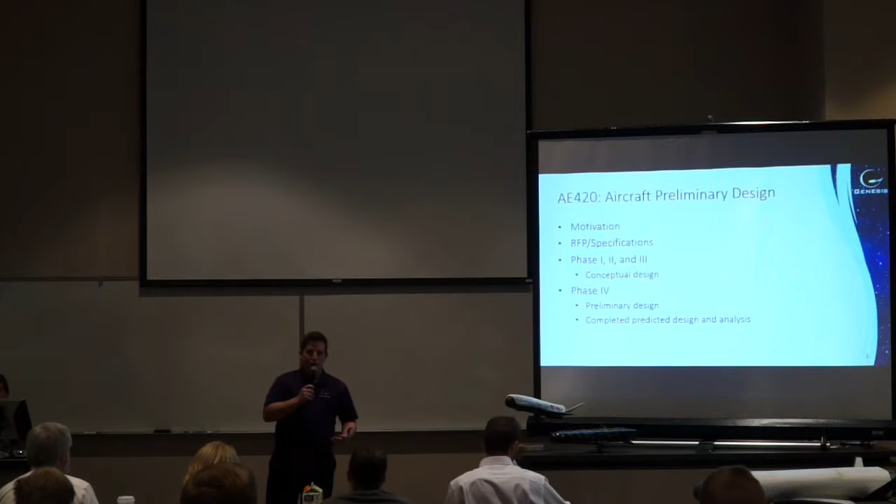This capstone project spanned 2 semesters. The first semester was AE420, the preliminary design. In this semester, we selected a project, received an RFP, went through conceptual design, followed by preliminary design, where we predicted performance values of the aircraft. This leads into detail design.

So our vehicle is an ambassador. It is the second stage in a 2-stage orbit launch platform. It serves the purpose to take satellites to low Earth orbit. This is relevant to today's industry as it is predicted that over the next decade, specifically the small satellite industry will be at a maximum. And those companies need a reliable, reusable, and therefore cost-effective method to take their payloads to low Earth orbit.

You just heard Launch Tech present their PT-1 design. It is the first stage. It carries us up to 60,000 feet, Mach 0.75, where we detach.

Moving into the RFP given to us, it is a combination from NASA and the DoD. 2 of the most constraining factors of this RFP were the 75,000-pound second stage weight limit imposed, as well as the fact that we had to be reusable. These 2 parameters significantly drove our design.

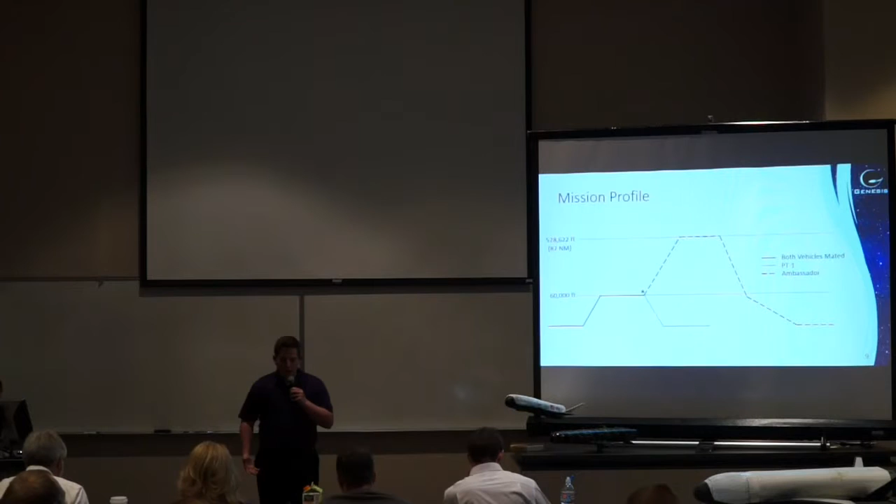Now, our conceptual design ended with these general conclusions. We decided to go with 2 RL-60s for our propulsion methods. We decided to go with unmanned operation. Furthermore, we went with a delta wing V-tail configuration, as is consistent with the majority of similar lifting body vehicles.

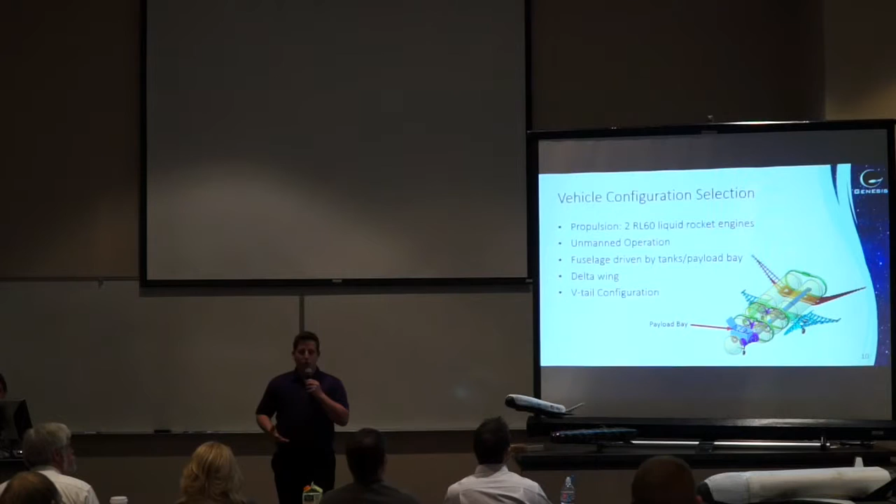And here's a 3-view of our preliminary aircraft design.

We ended preliminary design with a cost estimate for the entire project. These were based off of theoretical approximations, equations, and so forth. For an entire 3-system, that's 6-vehicle purchase, an initial investment of $13.5 billion. Each launch would then cost the operator $1.8 million.

Now I'd like to introduce Michael Rosnick to go over the preliminary predicted performance values with you. Thank you, Nick. So, as Nick just stated, I'll be going over the values that were predicted during the preliminary design of the Ambassador for its performance. These were all calculated using methods discussed in Raymer, Grant, and Nicolai, and some of the primary performance information is shown up on the screen.

The first plot I'll be showing you is the predicted CL alpha plot for the Ambassador. The aircraft was predicted to have a CL max of 1.1, and the wing was predicted to stall around 37 degrees angle of attack.

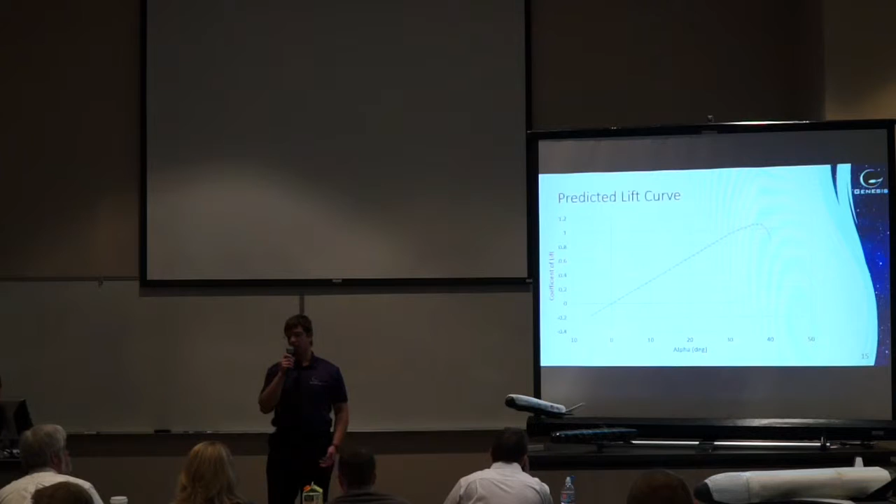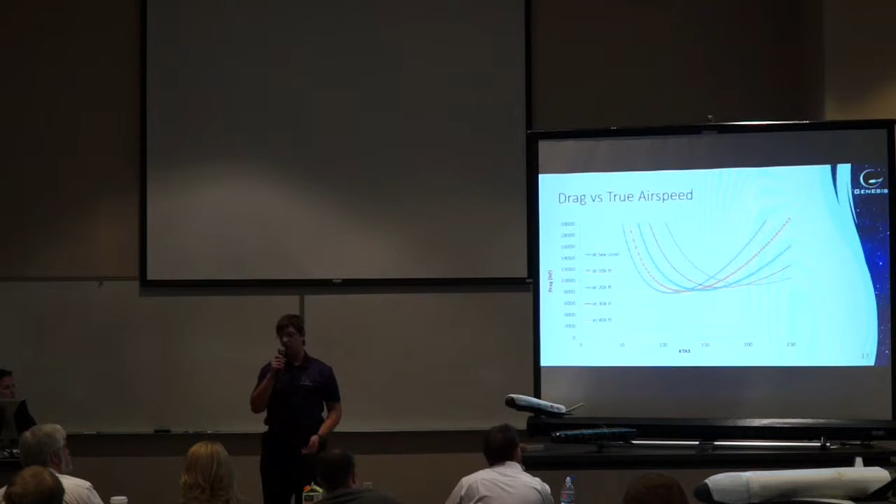Now, the drag versus true airspeed plot is shown, and this is plotted in increments of 10,000 feet from sea level to 40,000 feet. 40,000 feet is the altitude at which the Ambassador has fully transitioned from its ballistic phase of re-entry into gliding flight.

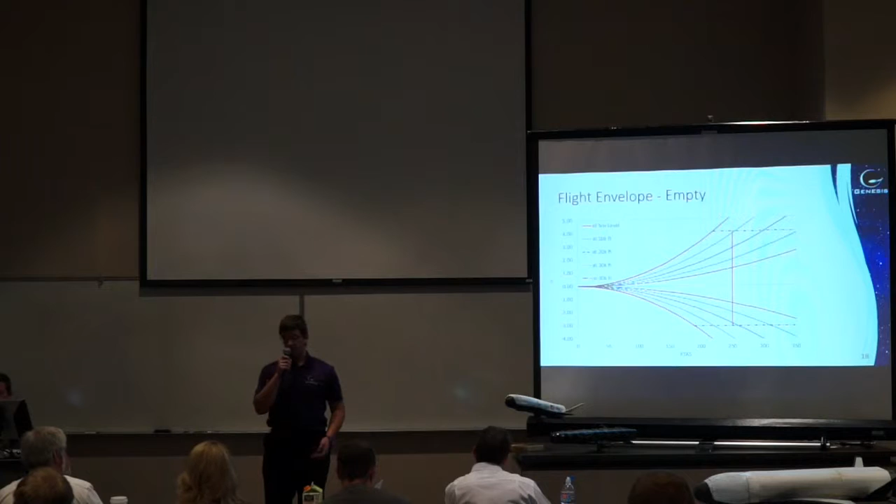Now the flight envelope is shown on the screen, and this is also shown plotted from sea level to 40,000 feet. The maximum positive load factor for the Ambassador is 4 Gs, maximum negative load factor of -3 Gs. The Q limit for the aircraft, as shown here, is 250 knots, and this is driven by the maximum landing speed. In flight, the Q limit of the aircraft is much greater than this.

Now, the trim plot for the Ambassador is shown with the CM alpha curves. These were plotted by looking at similar lifting body data, and we found that similar lifting bodies had a CM naught of roughly around 0.1. So this was used as a starting point.

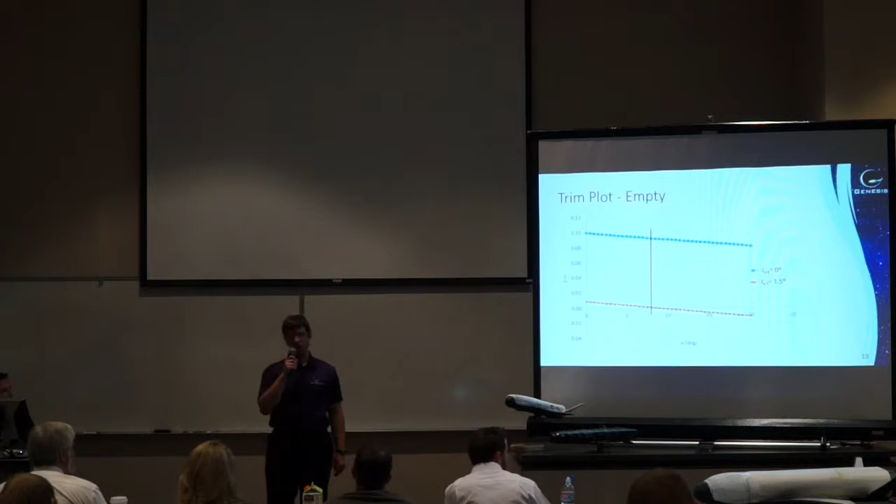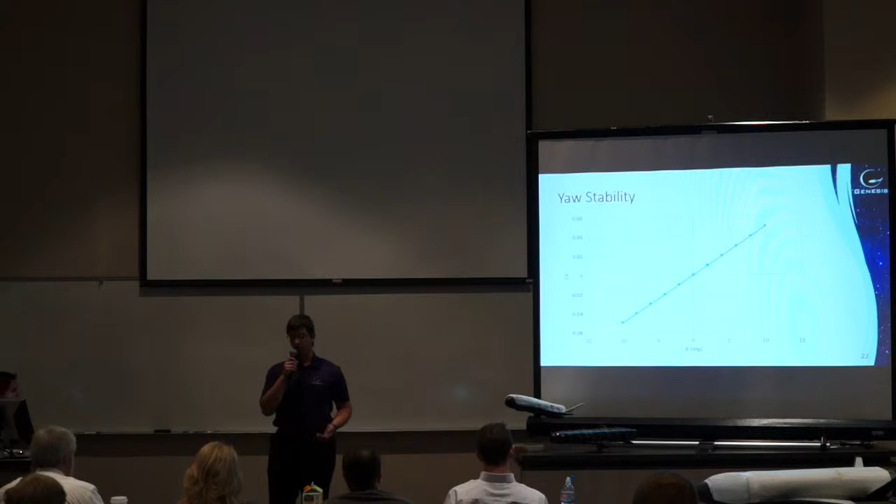Now the yaw stability plot for the aircraft is shown with a positive slope, indicating it was also predicted to be stable.

One other thing we wanted to do is try the aircraft as a flight test model. You can see that flight test model right here.

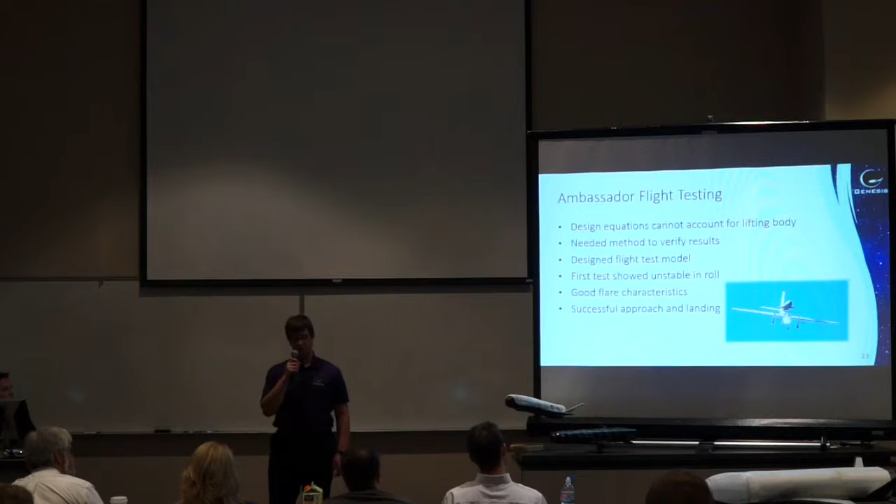One of the things we noticed is the design equations we used couldn't account for the lifting body design of our vehicle very well, so we wanted to verify that this design would actually fly. So this model was brought up on top of a larger remote-controlled aircraft and released from an altitude of about 200 feet. The initial tests found that the aircraft was very unstable in roll. This was corrected by adding a simple RC rate gyro to the aileron channel, and several successful approach and landing tests were conducted, with the vehicle found to have very good flare characteristics.

I'd now like to invite Veronica McGowan to talk about the initial wind tunnel model design.

Thank you, Michael. Everything you've heard in the presentation up until this point has been part of the preliminary design portion of the course. Everything from this point forward will be part of our detailed design course, things we worked on this semester specifically.

So the first thing we did this semester was design and build a wind tunnel model to verify these predictions that Michael just discussed from preliminary design. We also wanted to identify some areas in need of improvement so that we could further perfect the design and overall have a better vehicle at the end of the course.

So we chose a 1/32 scale model. You can see an isometric view of the CAD design there on the screen, and you can also see the wind tunnel model here on the table. We chose the 1/32 scale because we wanted the vehicle large enough to get good results.

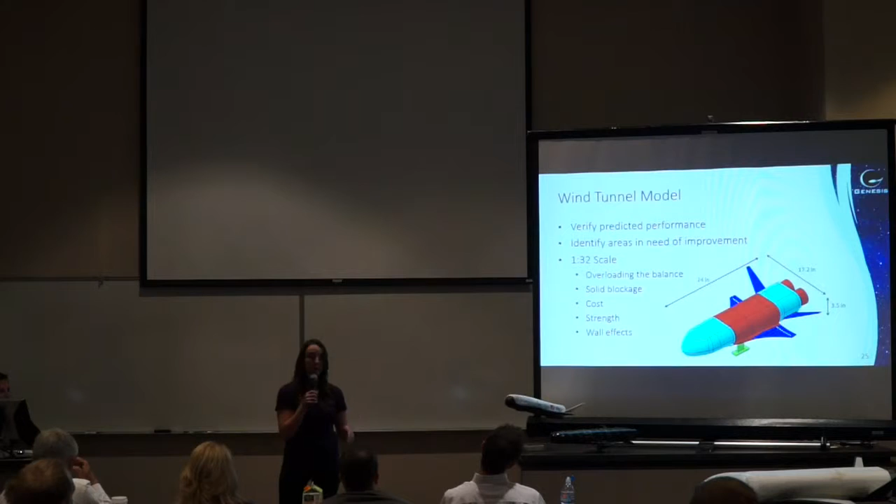However, we did have some constraining factors, the same ones you heard Launch Tech present as well. One of the big ones was not overloading the balance within the wind tunnel. We also wanted to avoid any wall effects or solid blockage. Also, we wanted to keep the cost down, and make sure our model was structurally sound.

So the model is made up of three different materials. We have ABS plastic, printed from the 3D printers in the rapid prototyping lab here on campus. We also had steel and aluminum components, and you can see the component breakdown per each material here on the screen.

So here's an exploded view of our model. You can see all the pieces pointed out right now are the plastic parts that we printed from the 3D printer. Overall, it was around $470 for the print.

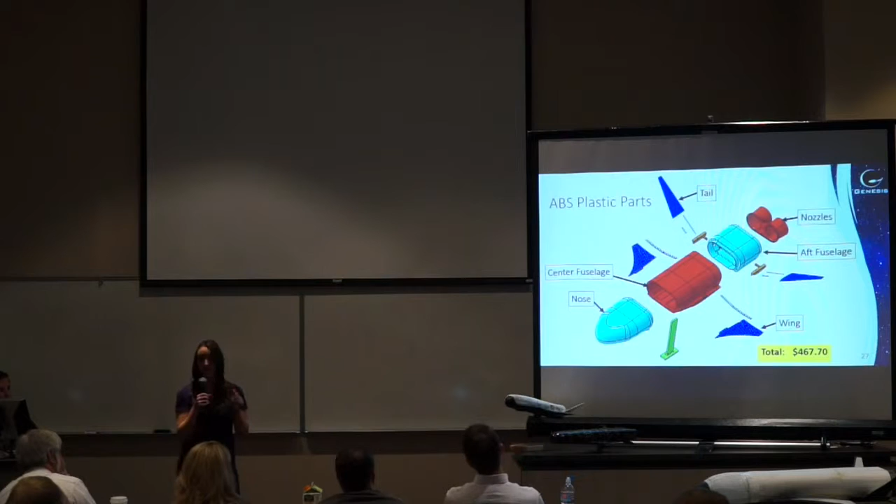Also, it's worth noting that the wings and tail surfaces were meant to be removable, so we could test without those. And the nozzle piece, the most aft portion piece you see there on the screen, was also designed to be removable, so we could access the inside of the fuselage and adjust set screws and tighten up those removable surfaces.

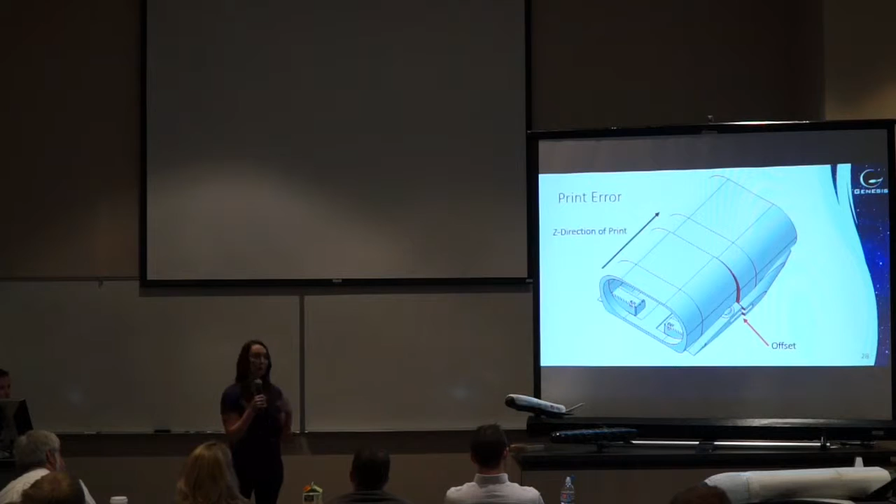So this was a very big print. It would have taken several hours to reprint it, more than a day, to reprint this piece. And due to the time constraint we had to figure out some way to salvage this piece. I'll get into more detail on that in the fabrication portion, but we were able to salvage it and continue with testing.

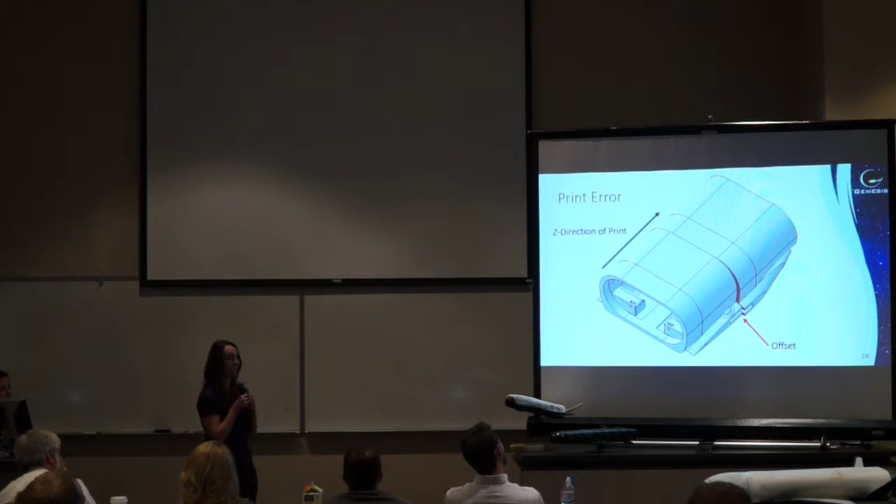So now I'm going to go into the fabrication of each of our components and then overall vehicle assembly.

So the first piece we had to fabricate was our Balance Mount. You guys noticed that Launch Tech had one as well. Ours was for the same intention, to lift the model slightly above the balance to try to reduce any drag interference we might get from that. So what we did is we purchased 1/4-inch steel from Prescott Steel here locally.

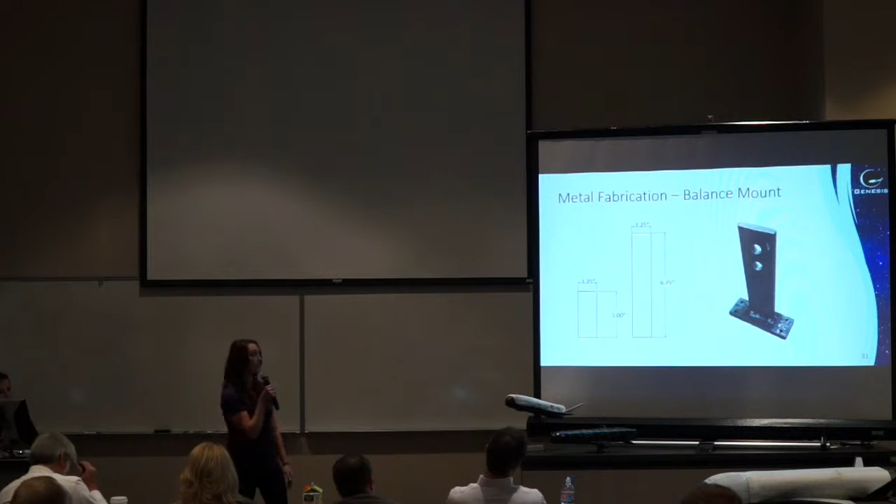We cut it down to the dimensions shown on the left of the screen. We had a welder weld the two pieces together on campus. We drilled holes on the horizontal piece to match those in the pyramidal balance, and we also have holes in the top portion to fasten it to our fuselage. We then put it up against the belt sander and got rid of those sharp edges to try to make it a little bit more aerodynamic in the wind tunnel.

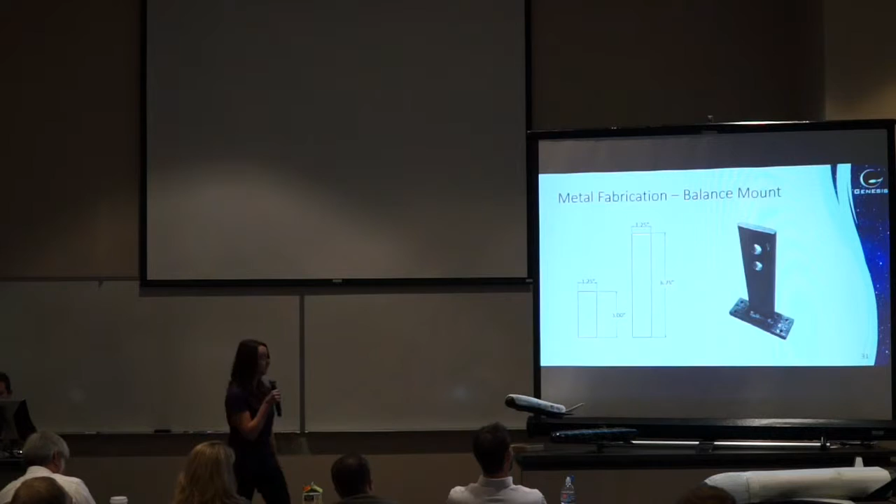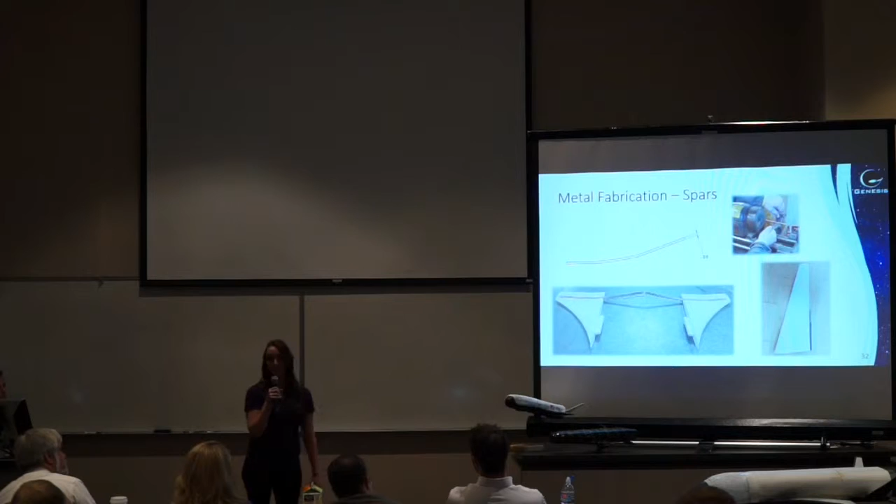We also had 2 spars on the V-tail surfaces: 1 forward, 1 aft, 0.2-inch and 1/8-inch respectively. One stuck out a little bit further as that would be the anchoring point to attach it to our model.

Another thing we had to fabricate out of metal was the tail mount. This is an interface piece that serves to fasten or anchor our V-tail surfaces to the model. Unfortunately, this was originally meant to be printed from ABS plastic, but during one of our test fits we noticed a crack start to develop. This is a very important piece, holding our V-tail surface to the model, so we wanted to make sure that was functioning properly during testing. So we ended up fabricating this out of solid aluminum.

You can see on the screen the only thing left that needed to be done at this point was drill 2 holes for the set screw and anchor the point.

So I mentioned that 3D printing error we had earlier. How we accounted for this was we basically cut the model in half right along that center fuselage offset line. We had a thick enough surface of the vehicle that we could actually drill through the vehicle's thickness and insert remaining rods we had from the V-tail spars. So we epoxied those rods in on either side of the cut, and we also epoxied to bond the 2 halves together of that center fuselage.

We also had leftover aluminum plates from our wing spars, so we were able to bolt that on either side of the center mount there, just to ensure we wouldn't get any bending and the vehicle would not disassemble in the middle of testing. We did use countersunk screws because we wanted to make sure the top surface of the fuselage was as flush as possible so as not to interfere with the flow during testing.

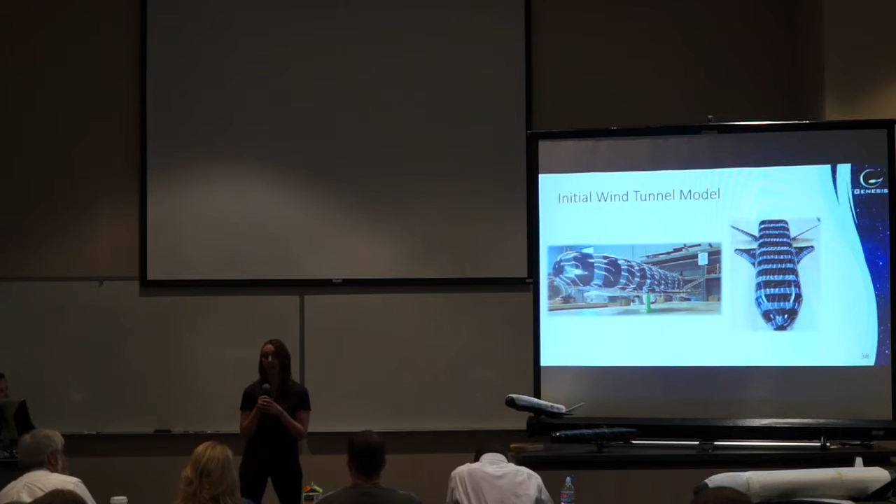So what you guys are seeing on the screen now is the initial wind tunnel model, a 1/32 scale replica of the preliminary design vehicle we came up with. We used hardware available to us at the machine shop to assemble the vehicle together, and with this model we went through our first series of wind tunnel tests.

The configurations you're seeing on the screen: FWE, which stands for fuselage, wing, and empennage, is our fully assembled vehicle. We also had an FW configuration, fuselage and wing only, with the V-tail removed. Then the F configuration, fuselage only, with the wings and V-tail removed. You'll see these mentioned throughout the rest of the report, so there's a visualization for you to see what it looked like throughout testing.

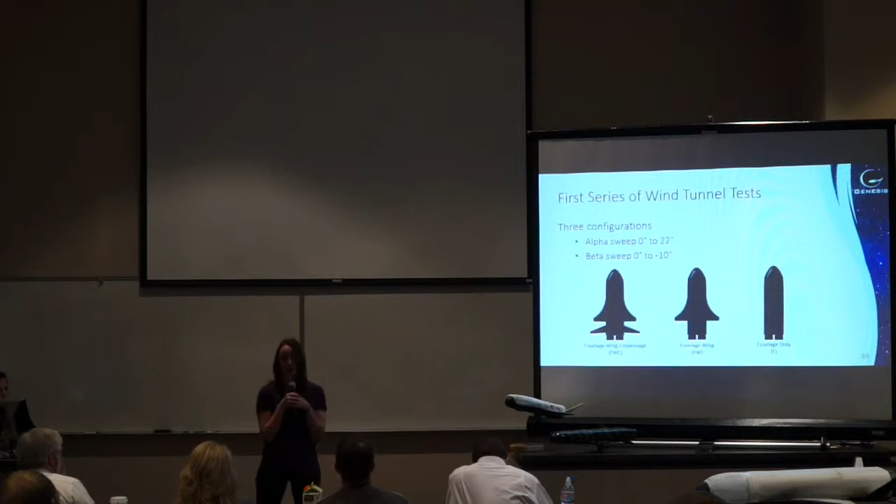Now the reason we did this is we wanted to test how effective our aerodynamic surfaces were. We also have a lifting body fuselage, so we wanted to see the effect of that as well in the wind tunnel test. So we ran through two sweeps with each of these configurations, a full alpha sweep and a full beta sweep.

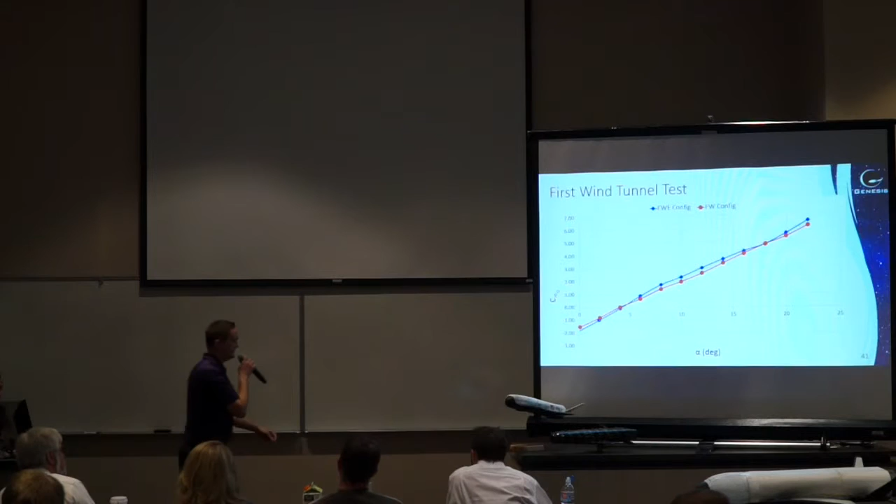So after we completed our first set of wind tunnel testing, we were looking at our data and noticed a few anomalies or weird things we didn't expect to see. What you're looking at here is a small sample of that data. This is a pitch stability plot comparing our full FWE configuration along with our tail-off configuration, or FW. A couple things we noticed that looked weird with this plot: one, the magnitudes were absolutely huge.

We were getting pitch moment coefficient magnitudes of upwards of 7, which didn't make sense to us. The second thing we noticed was when we took the tail off, it slightly stabilized us, and since the tails are at the back of the vehicle, that didn't make much physical sense. How could you take the tails off and have that help stabilize you in pitch? So we thought something might be wrong here.

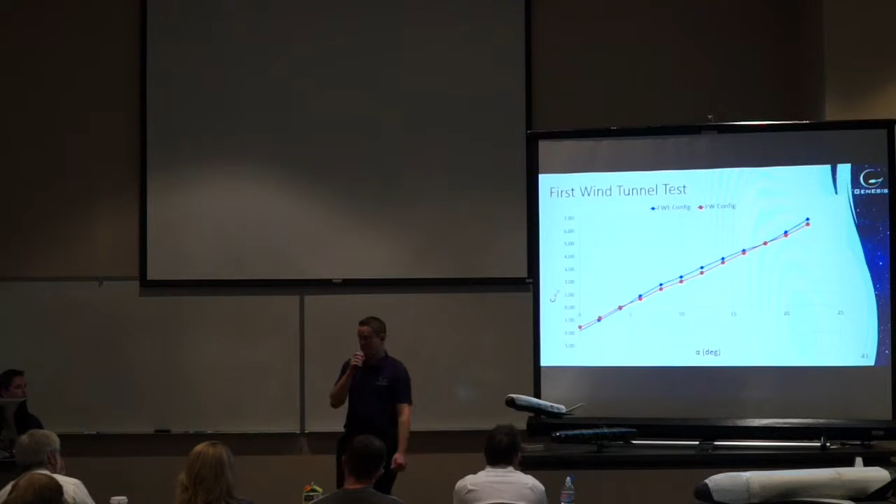We decided to review our procedures and check out the wind tunnel testing equipment. What we found was that during setup of the wind tunnel, we actually entered our CG improperly into our data acquisition software. So our CG that we were testing with was very far aft and above the model, which explained our huge pitching moment coefficients as well as the tail-off stabilizing effect.

So we attempted to correct this data with statics equations, and that went okay, but we didn't really trust that data because we had to make some assumptions about what our data acquisition software was doing, and we didn't trust those assumptions. So from this point forward, we decided we're not going to look at this data.

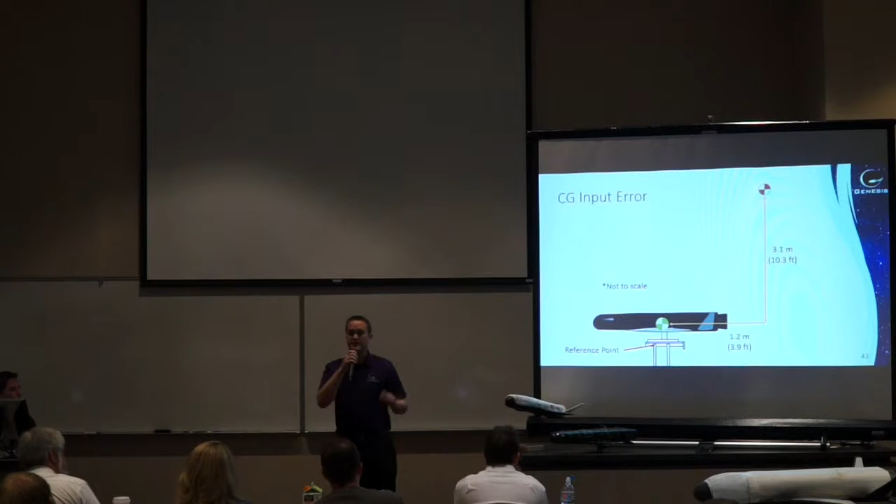Any data you see from this point forward is going to be either predicted from our preliminary design semester, or data from our second set of wind tunnel tests, which I'll get to in a bit. For that second set of wind tunnel testing, the first thing we wanted to do was retest our full model, our FWE configuration, to establish a baseline to compare our modifications against.

The second thing we wanted to do was test our control authority with our all-moving V-tail surfaces. The last thing we wanted to do was add a body flap to our model. This is because most lifting body vehicles have a body flap, and we did not have good equations to account for that in our preliminary design semester, so we wanted to add one during our wind tunnel phase of testing to see what its effect on the control of our vehicle would be.

Now, the V-tail incidence angle is defined with respect to our dihedral plane. The tails are at a 28-degree dihedral angle, and the model already had that capability built into it because that was something we were planning on adding.

The V-tails were friction fit into the model using internal set screws, and all you had to do with the model was just grab and rotate the tails by hand.

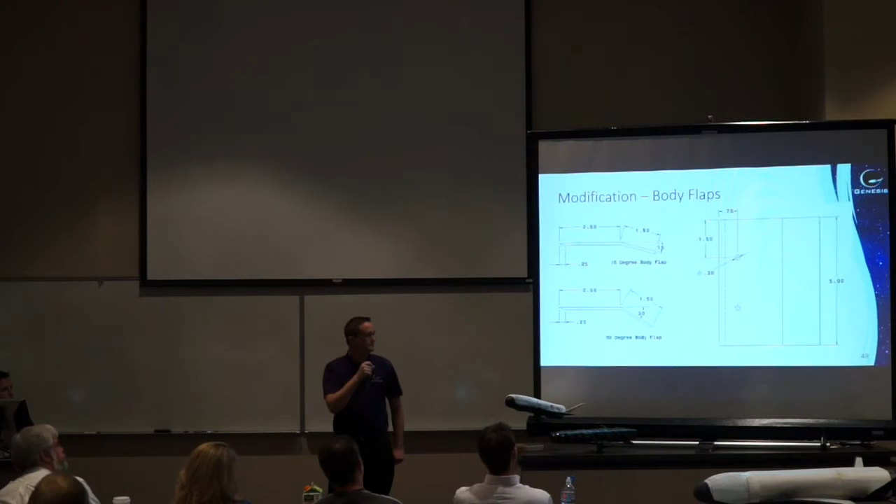Now for the body flaps themselves, they were fixed. They could not deflect like the V-tails could. So those were just made out of flat plate aluminum, and we had 2 testing points, a 15-degree deflection as well as a 30-degree deflection. Each of those is shown on the left-hand side of the screen there along with their overall dimensions.

To make those body flaps, we sheared the flat sheet of aluminum into the proper overall dimensions. We bent it into shape using a sheet metal brake. On the right-hand side of the screen, you can see a test fit of one of our completed body flaps.

Now, to make the body flaps, we just used scrap sheet of aluminum that we found in our machine shop, so that didn't cost us anything. That keeps the overall cost of our model for wind tunnel testing at about $475.

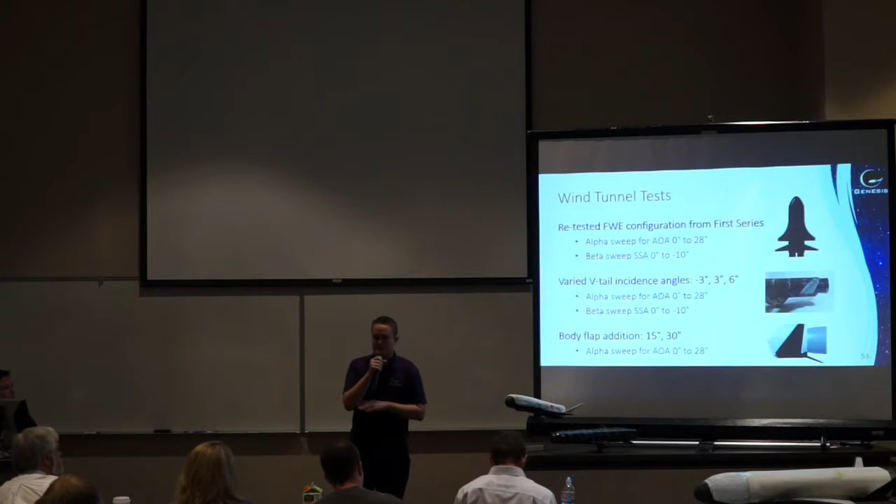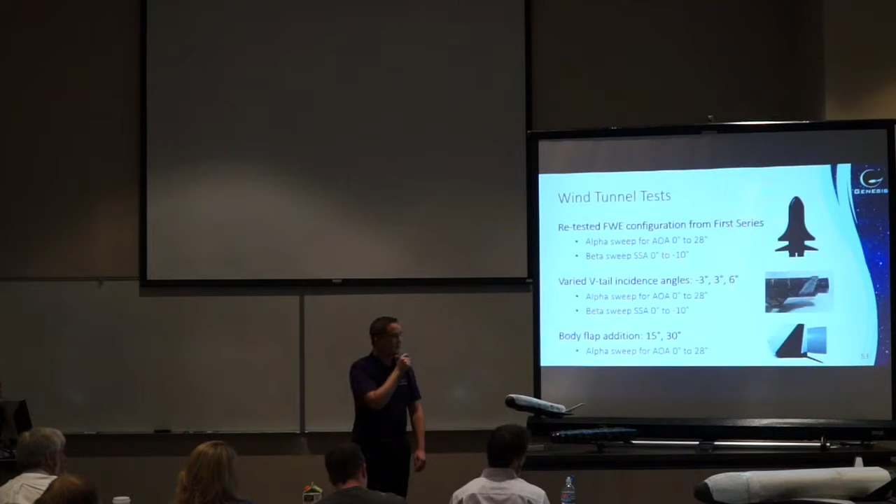So just to reiterate the wind tunnel test we are doing in our second set of wind tunnel testing here, we are retesting our FWE configuration. We did an alpha and beta sweep with that model just to establish our baseline for comparison against our prelim semester. Secondly, we varied our V-tail incidence with -3, +3, and +6 degrees of V-tail incidence.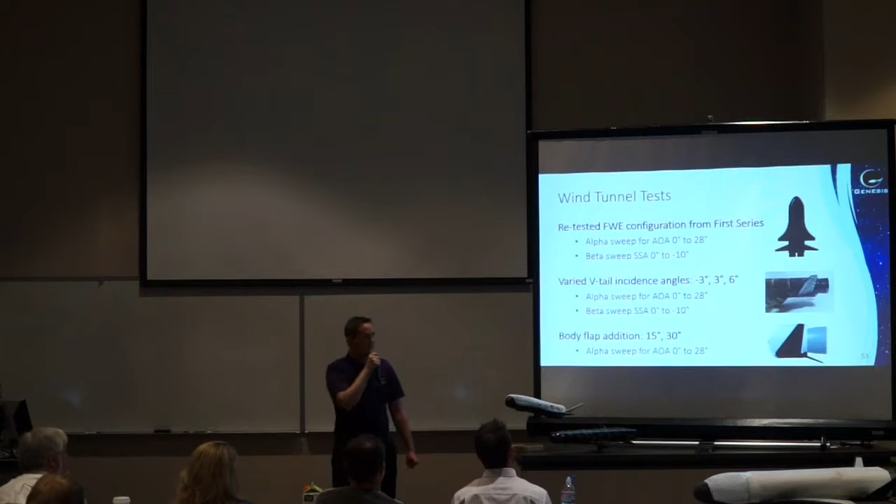We did an alpha and beta sweep with each one of those test points. Lastly, we reset the tails back to neutral incidence, and we tested a 15 and 30-degree body flap deflection with just an alpha sweep for each one of those test points. Now I'd like to welcome up Chris Crawford to talk to you about our wind tunnel and some of the data that we got from those tests.

Thank you, Brandon. So as you can see, this is an overview of the wind tunnel we used. We used an AeroLab 87 series closed circuit wind tunnel. The test section of this wind tunnel had a cross section of 35 by 42 inches.

Inside the test section was a pyramidal balance. This balance is capable of performing the things you see on the screen here. In addition, the maximum and minimum angle of attack shown, and the sideslip angle variations. Also, we imposed a 40-pound load limit on this balance, so we do not overload it.

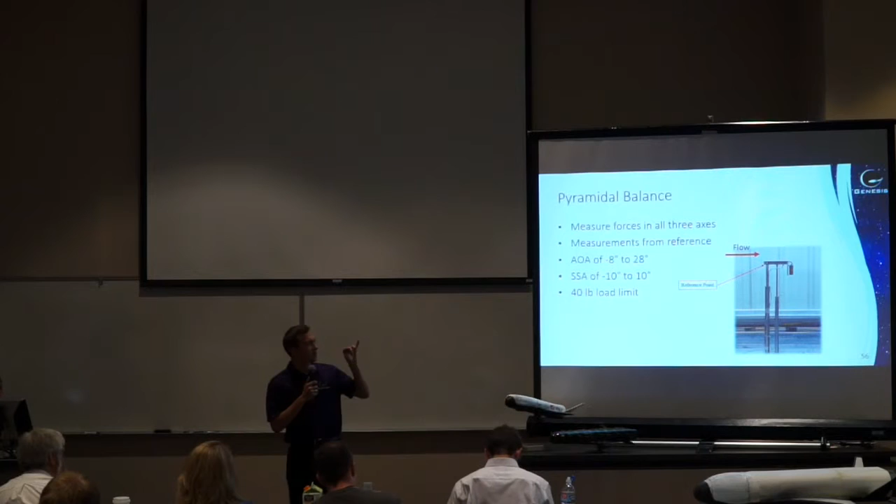One thing I forgot to mention previously was there was a reference point indicated on the balance. This point is where all the CGs are referenced from.

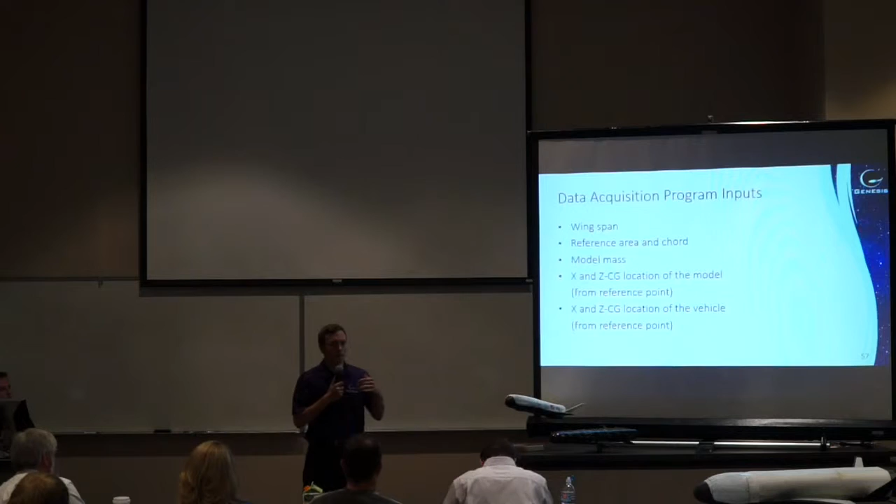The data acquisition program required inputs, primarily geometric inputs of the model, to non-dimensionalize the aerodynamic parameters we'll be getting from the balance. A couple of important parameters are the X and Z CG location of the model, and also the X and Z CG location of the vehicle. The X and Z CG location of the vehicle were scaled down to the size of the model.

This is the model structural test we performed once the model was in the wind tunnel, to ensure it was capable of withstanding the forces in the wind tunnel. From this, we determined that the angle of attack range we would test at was 0 to 28 degrees, and the velocity would be 24 meters per second, or about 79 feet per second.

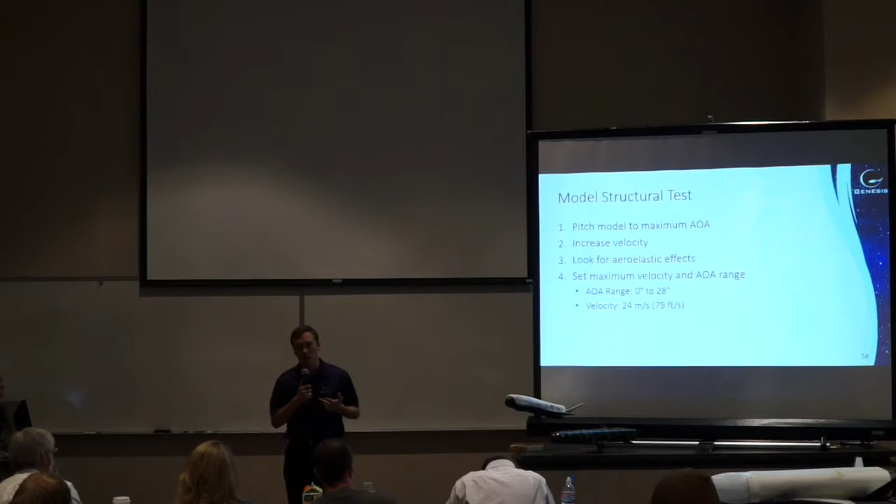In addition, we did a tare procedure to try to counteract some of the effects that the pyramidal balance might have on the aerodynamic properties of the model. This was done with the balance at 0 degrees.

The primary methods we used to collect the forces and moments on the model were alpha and beta sweeps. An alpha sweep was conducted to find lift, drag, and pitching moment data. Beta sweeps were conducted to find yaw and roll parameters.

So you can see here that the next few plots are going to show tests from our second set of wind tunnel testing, like Brandon stated earlier.

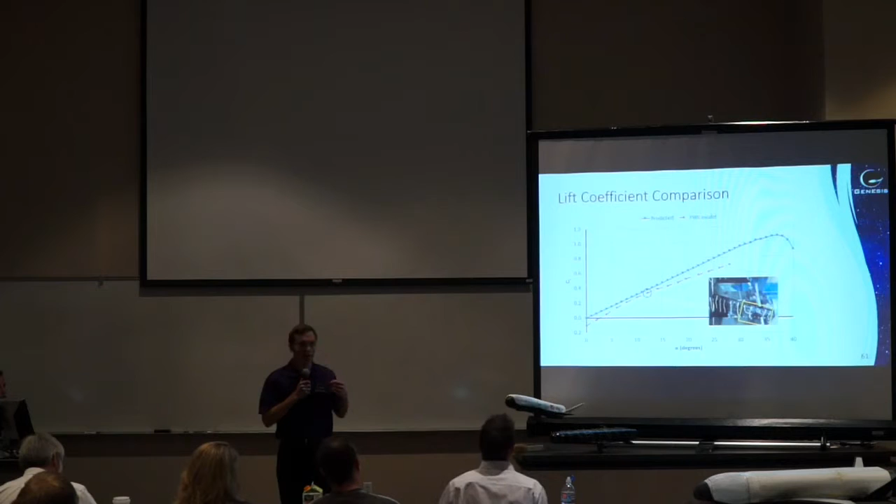This is a graph of the lift curve slope. As you can see, it matches fairly well, except at about 12 degrees, where there's a deviance in the slope of the CL-alpha plot. This is due to the fact that the tails began to stall at this point. You can see this corroborated with the flow shown on the plot.

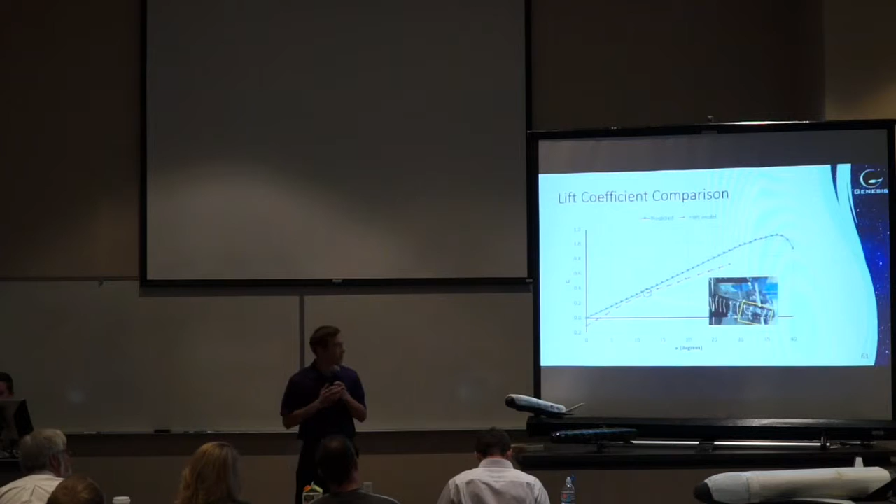The V-n diagram did not change appreciably from the preliminary design phase. So here's the V-n diagram again.

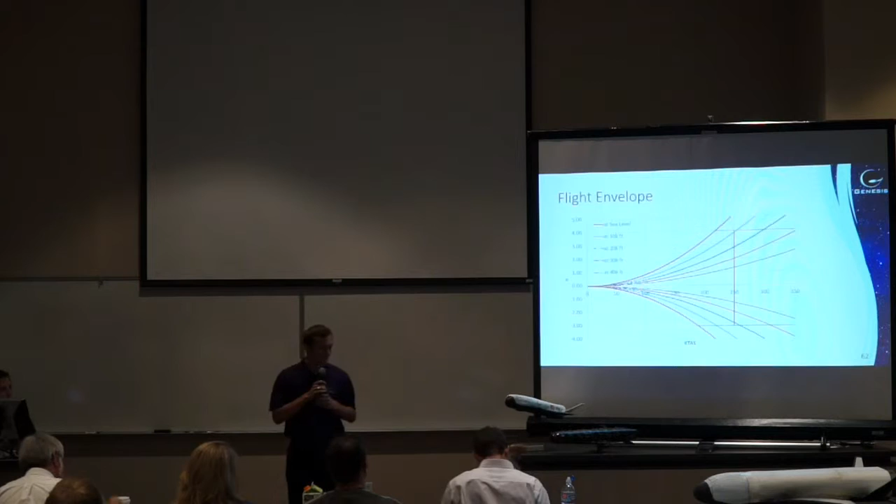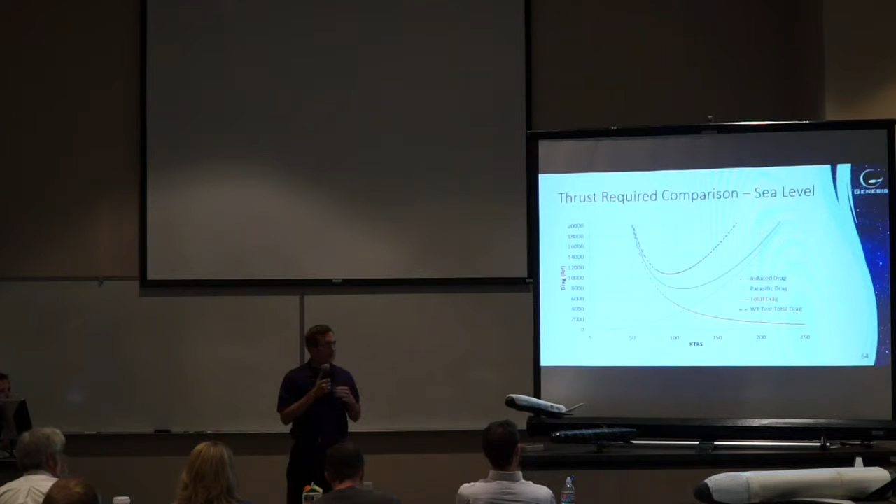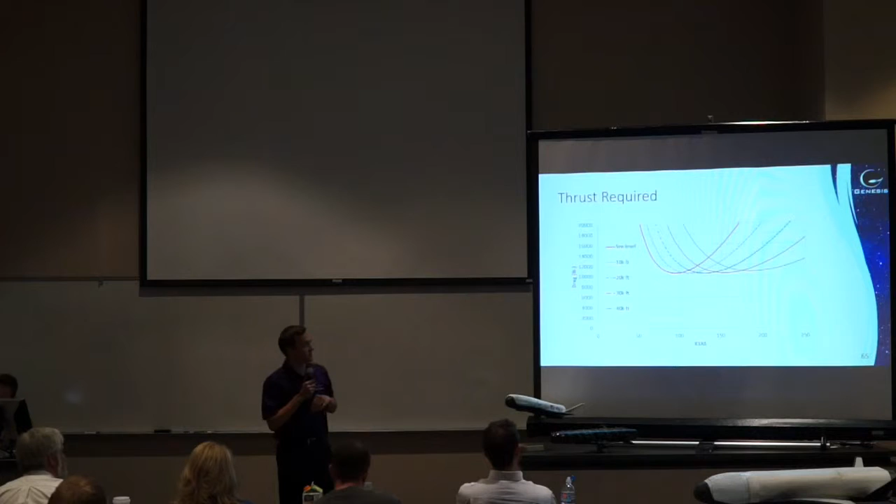The drag we predicted was also significantly lower. The most likely reason for the increase in drag was due to the separation of drag on the fuselage, which we couldn't really account for in the preliminary design phase. This increase in CD naught shifted our thrust required plot, the minimum drag point, to the left a little bit, as you can see in this plot. This also shifted the overall thrust required plot up because of the increase in drag.

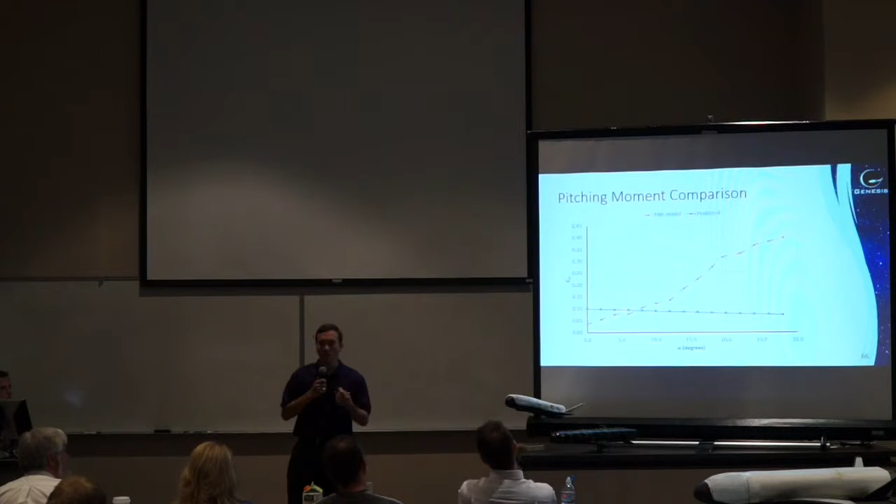Here you can see the pitching moment we got from the wind tunnel model. As you can see, there's a significant difference from what we predicted. This is primarily due to the fuselage effects that we couldn't readily estimate in the preliminary design phase.

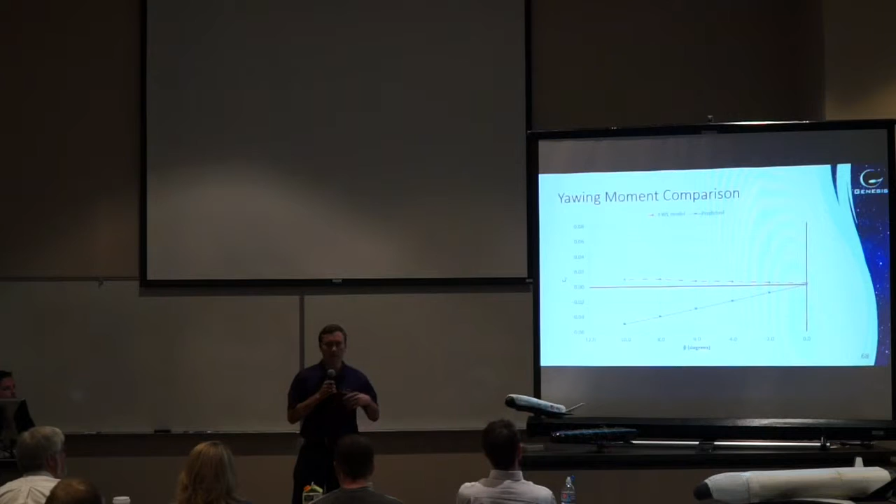Again, here you can see a yaw moment comparison. Yaw moment is relatively neutral compared to the predicted value, and again the reason for this is possibly due to the blanketing effect of the fuselage on the opposite tail.

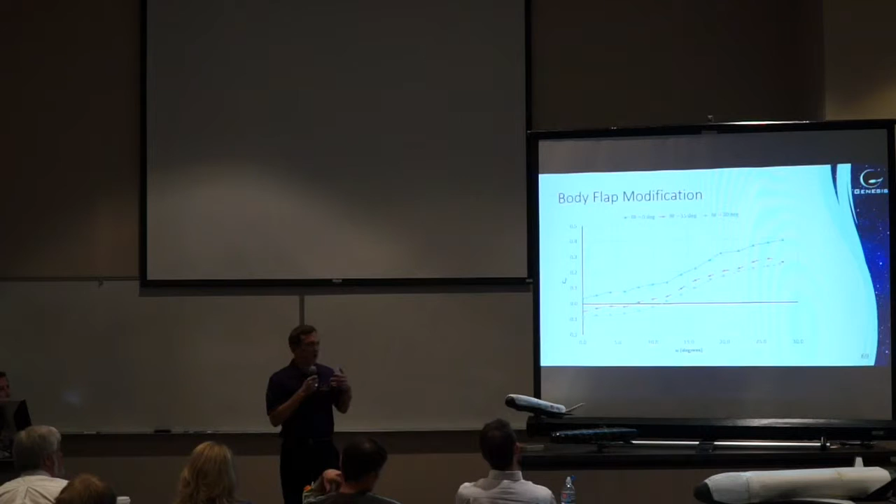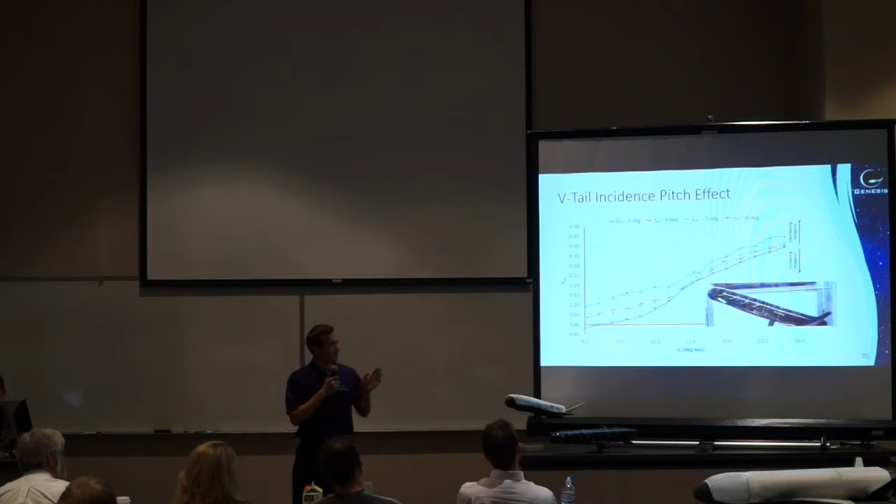One other thing to note is that there's a sharp increase at about 8 degrees at various points. This is due to the shifting stall of the tail as the incidence increases. Also, you see a kind of bottlenecking of the data around the zero and positive incidence angles of the tail. We theorize this is due to the downwash effect induced on the tails of the model.

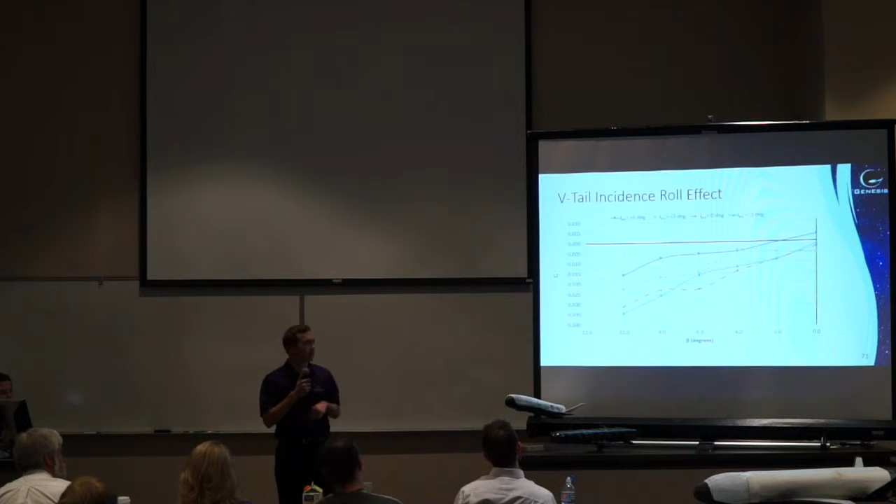Again, this is the effect of the tail incidence on rolls, and as expected, they decrease the value of the rolling moment. You also notice some variance along the slope. One theorized reason is the effects of the fuselage and the congestion in flow at the tails, which could vary the rolling moment. Also, increasing incidence increases the yaw moment.

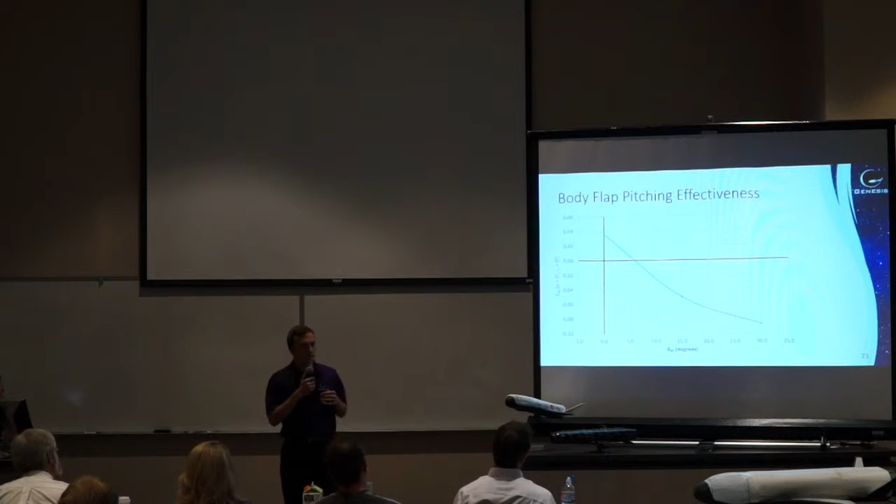Here you can see a plot of the body flap effectiveness. While the body flap does not change the slope of the overall aircraft CM alpha, it does shift the value and is effective at doing that. You also notice that the trend is fairly nonlinear, as indicated earlier.

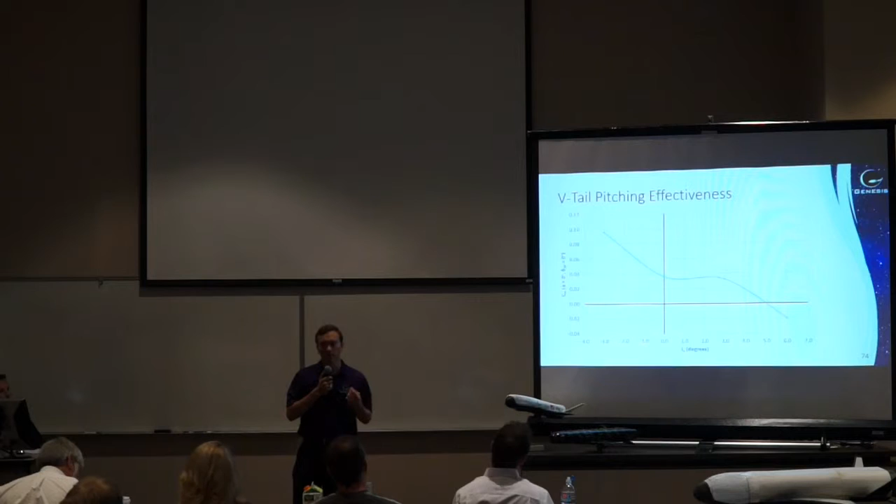In addition, the V-tail has similar nonlinear trends. You can see where the data earlier was bottlenecked, where slightly positive incidence angles of the V-tail are not nearly as effective as a negative deflection. This is theorized to be due to the fact that at negative incidence angles, the V-tail is removed from some of the congestion present on the upper surface.

Now I'd like to welcome up Morgan Cherry to talk about the flow visualization and the requirements.

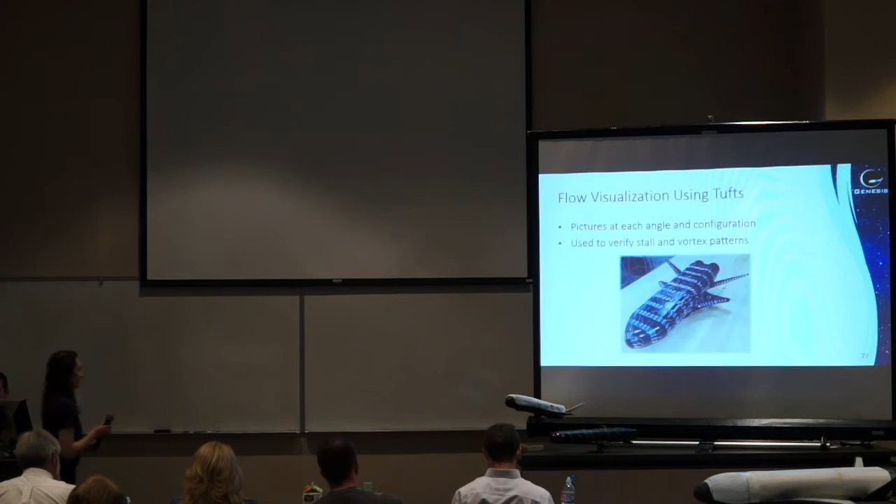Thank you, Chris. As Veronica previously mentioned, we added tufts to the model to visualize the flow. To capture the flow visualization, we took pictures from the side and top of the model at every angle and configuration. Flow visualization is important because it can show the flow over the model and serve as verification for the stall and vortex flow patterns seen in the plotted data.

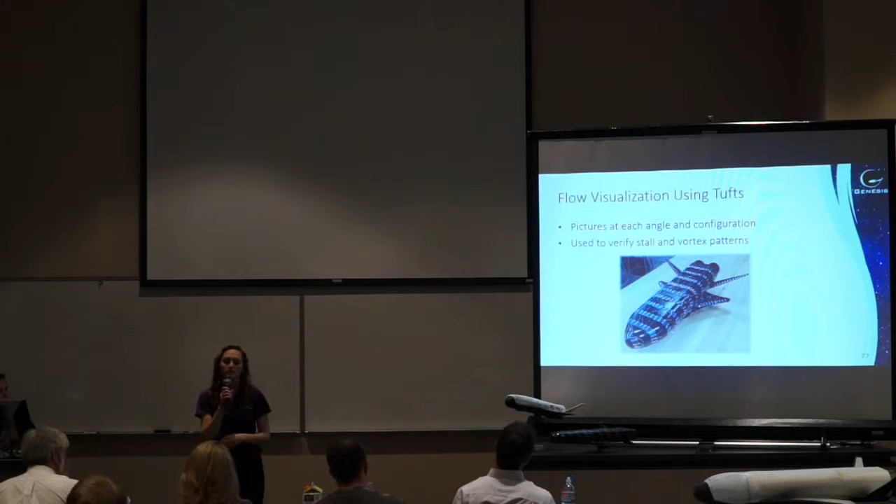The first disturbance in the flow we saw was at 8 degrees alpha on the wings. At the leading edge of the wings, the tufts began to curl outward and around, indicating leading edge vortex flow. Also at 14 degrees, the wings are now dominated by this leading edge vortex flow, with the tufts curling around and pointing along the path of the vortex.

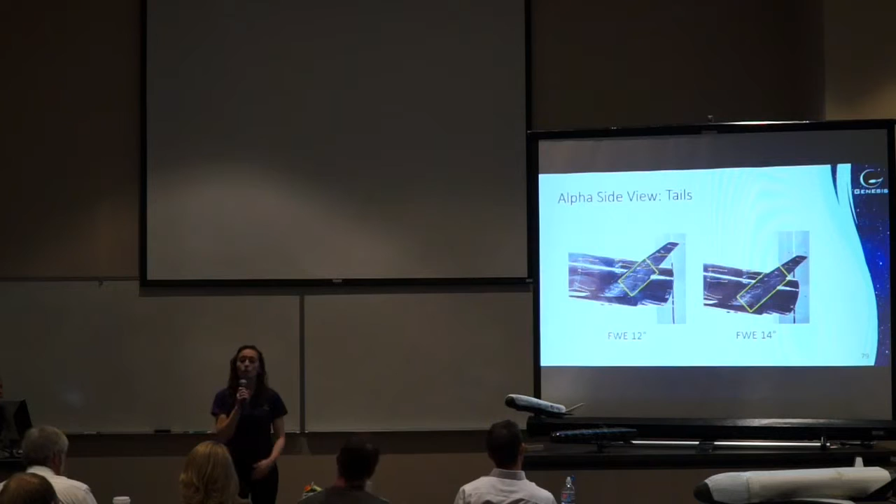Also at 12 degrees, on the underside of the tails, we noticed disturbed flow. This could be due to forebody vortices. However, because the flow wasn't visualized off the surface, we could not verify this theory.

Also at 12 degrees, from the top view of the tails, you can see we're starting to get some flow separation. So at 12 degrees, the tails are beginning to stall, and by 14 degrees, the tails are fully stalled.

Now, for a tail incidence angle at -3 degrees, the tails begin to stall at 14 degrees and are completely stalled by 18 degrees. At an incidence angle of +3 degrees, the tails begin to stall even earlier, at 8 degrees, and are completely stalled by 14 degrees. And at an incidence angle of +6 degrees, the tails begin to stall at 6 degrees and are fully stalled by 10 degrees. The pattern we're seeing is that the tails are fully stalled 4 degrees earlier as the incidence angle is increased.

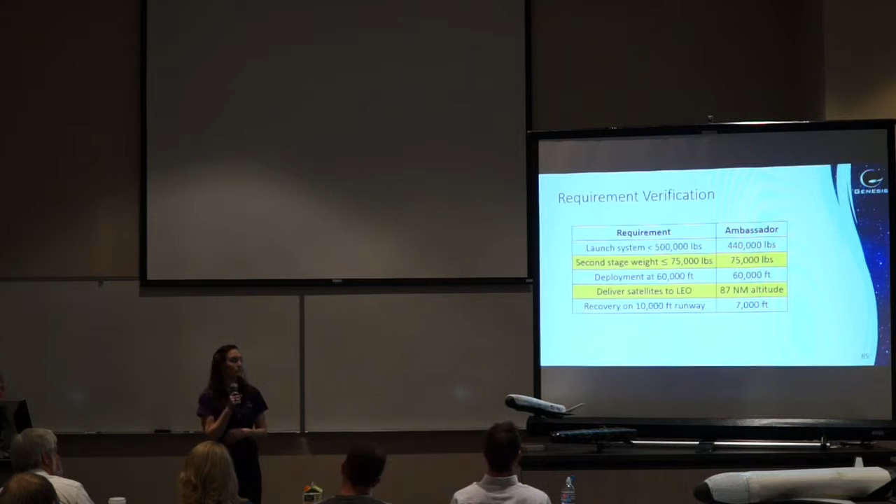Now we do meet all of the RFP requirements you're seeing on the screen. However, we barely meet the weight requirement of 75,000 pounds for delivering our satellites to low Earth orbit. Low Earth orbit extends from 87 to 174 nautical miles, and we're only reaching 87 nautical miles due to our weight and the current propulsion systems available to us. We also meet the RFP and CFR requirements listed on the screen. The only thing left to do would be to acquire mission and operator licenses.

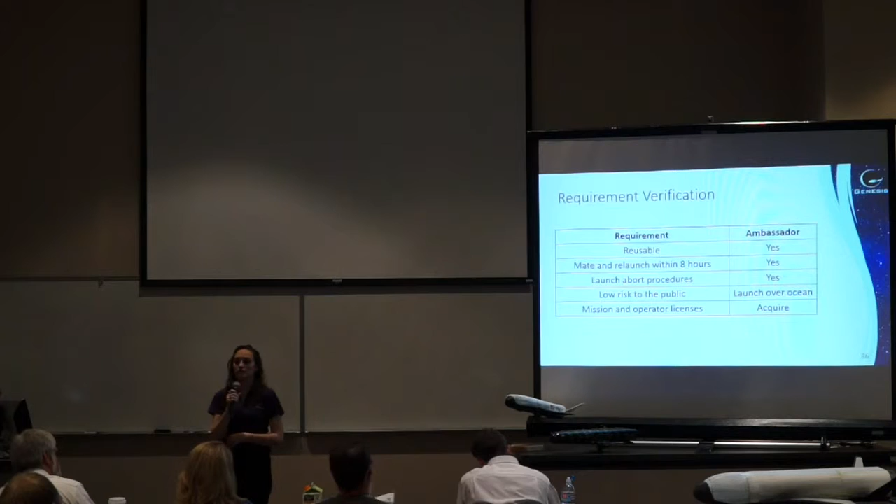Now I'd like to invite Erica to talk about the structural layout and analysis.

Now what you're seeing is the VN diagram for our wings. This is not to be confused with our flight envelope. This is in KEAS, not true airspeed.

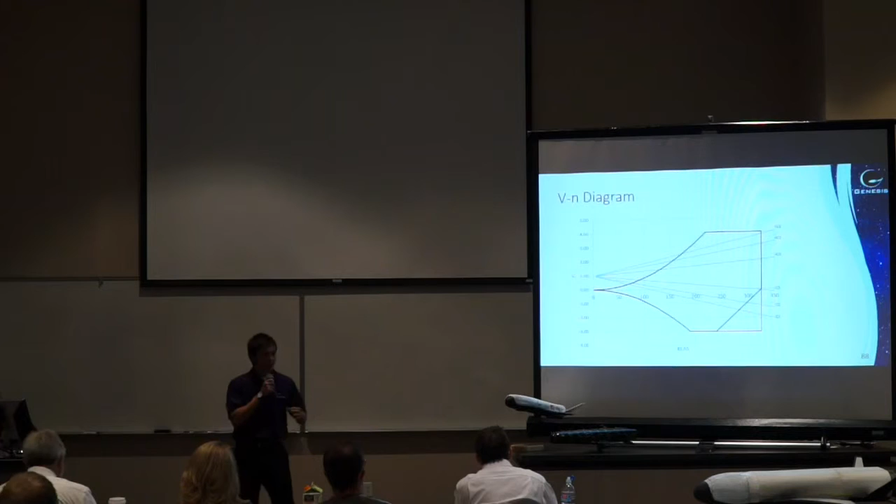Since our wings are so small, they produce very minimal lift, so gusts have very minimal effect on our overall structure for our wings.

What's in purple is the tank braces. It's what's in between each tank to help brace them. The tanks are shown in yellow.

Our tanks are indeed structural, since at any point in time throughout our mission, there will be anywhere between 6 and 14 atmospheres at all times.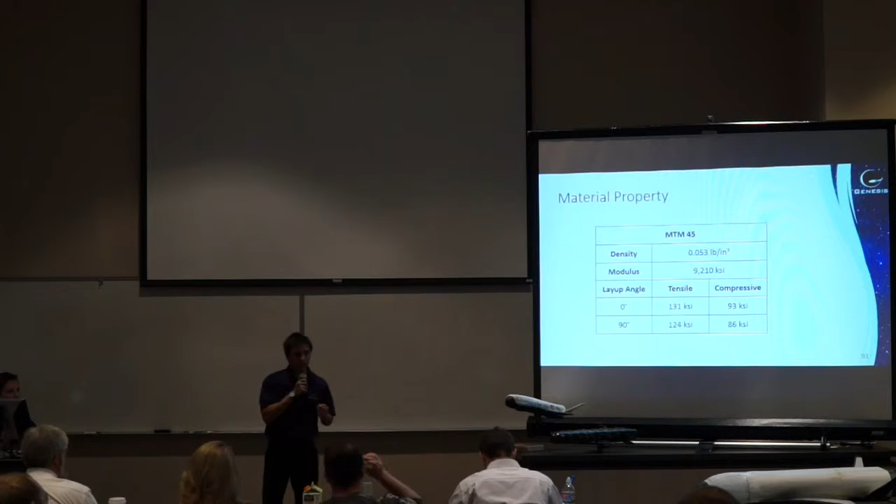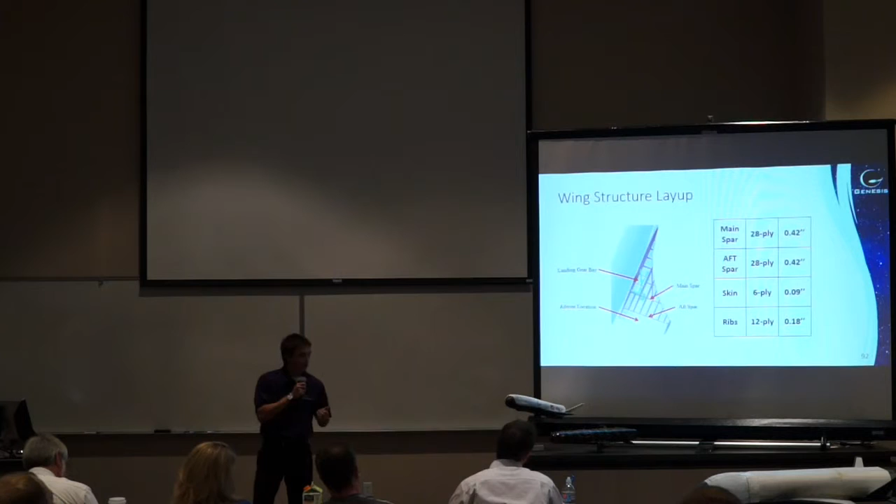To further go into the layup of our wing structure, you can see it shown on the screen, with some key parameters pulled. The main and aft spar were a 28-ply layup, the skin was a 6-ply layup, and the ribs were all 12-ply layup, with thicknesses shown in the table. What's shown on screen is a picture pulled from ANSYS Workbench of the wing internal structure.

Now to go into further detail of our tail structure layout, one of the biggest things is the pivot tubes. Since our V-tails are all moving, this is the point at which the V-tails are solely attached to our vehicle and pivot. That, along with the forward spar and aft spar, are all 28-ply layup.

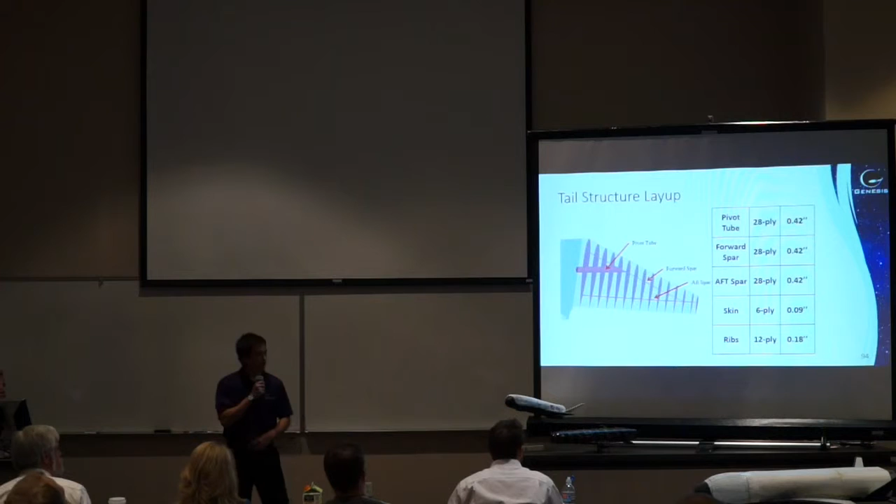The skin is once again 6-ply, and the ribs are once again 12-ply, with respective thicknesses shown in the table. Once again, you're shown the picture from ANSYS Workbench of the internal structure of our V-tails, shown as the maximum shear stress.

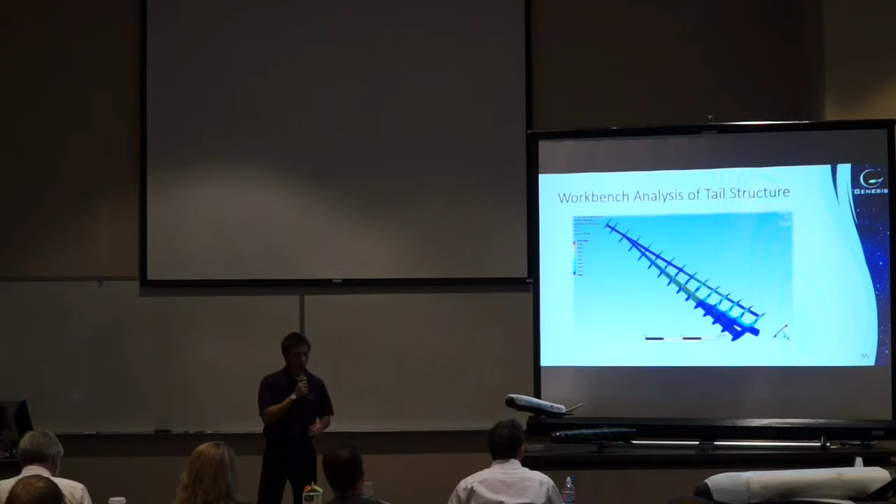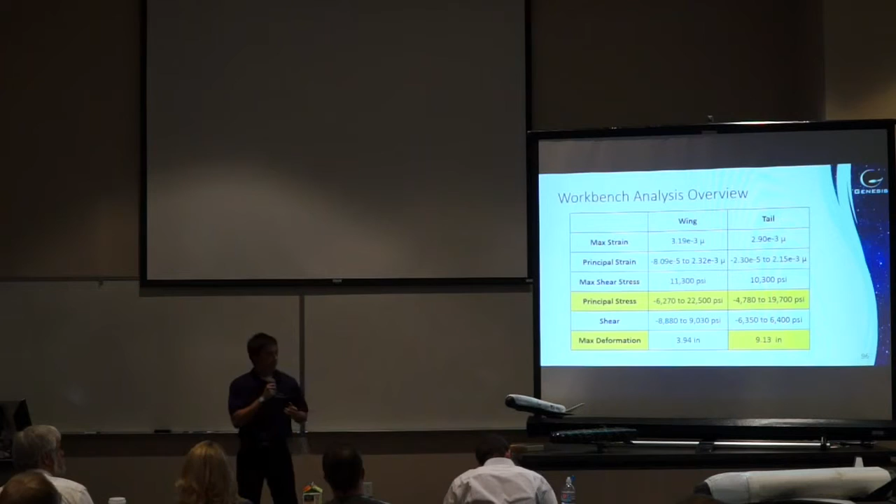Now to look at some of the key values pulled from the overall ANSYS analysis. One of the big ones is the principal stresses, highlighted in yellow. The maximum stresses from the analysis were about 20% of the overall maximum compressive and tensile strength of our material, so it holds up pretty well.

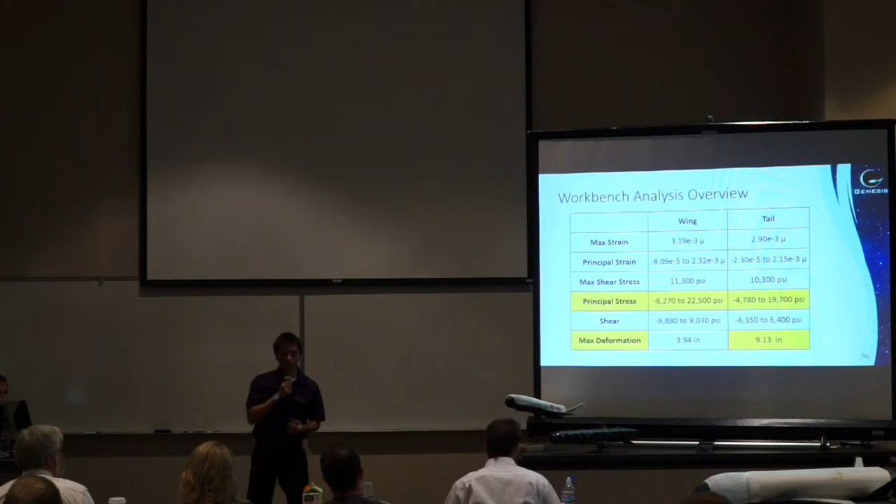One of the biggest things is the deformation of our V-tails. It has about over a 9-inch deformation at the tip of our V-tail, so it's something to look into for the research of our structural layout.

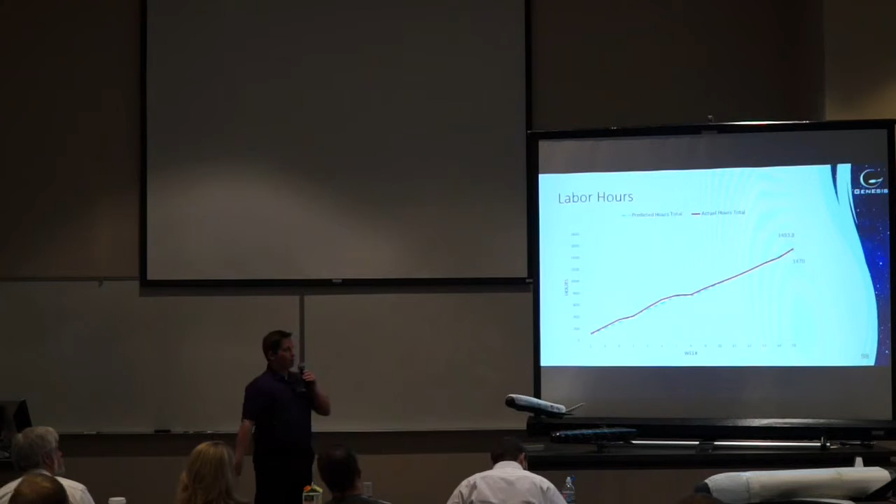So here, as you saw with launch deck, is the hours weekly that the group has logged. You can see our predicted hours in blue there, and the red line follows that fairly closely.

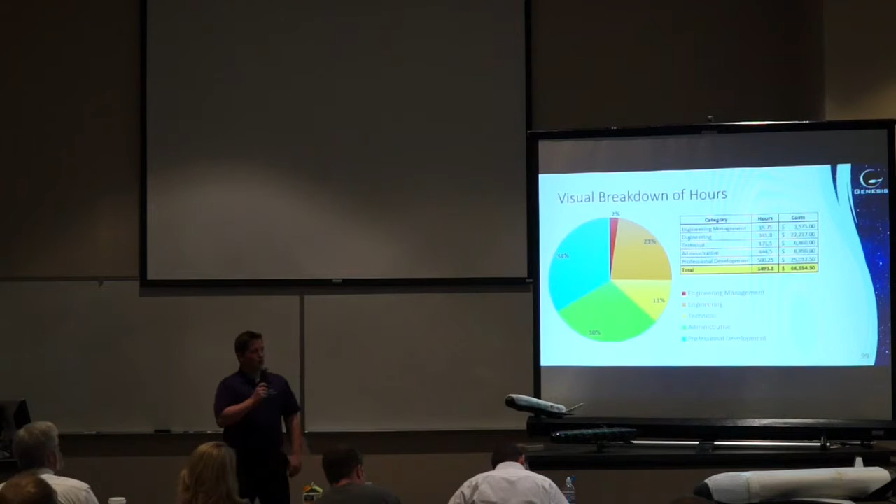Here is a visual breakdown of the cost. Each one of those categories had a dollar per hour amount associated with them.

Moving into some conclusions, we conclude that the control surfaces, the V-tail, and the body flap were effective in addressing some of our pitch issues. All it did was give us a region at any given angle of attack where we could manipulate that pitching moment. To be specific, that didn't affect our stability. We are still unstable. Our CM alpha is still positive.

Moving into the second point, we only analyzed a certain amount of tests. We only did 3 tests for the V-tails, for example, 2 tests for the body flap. So in order to expand this control envelope, we would need to do further tests, and that might indicate we need to make the control surfaces more effective. Also, as Morgan stated, we satisfied all the RFP requirements.

Which leads into recommendations. First and foremost, we were only able, with our tools, to either predict and test conditions at subsonic speeds, low altitudes. So we didn't have the tools to predict any sort of reentry aerodynamics, nor did we have the capability to predict or test any sort of supersonic characteristics. And when this vehicle does go supersonic, that aerodynamic center will shift and possibly could make us unstable. However, we can't speculate on that as we don't have any analysis to back that up.

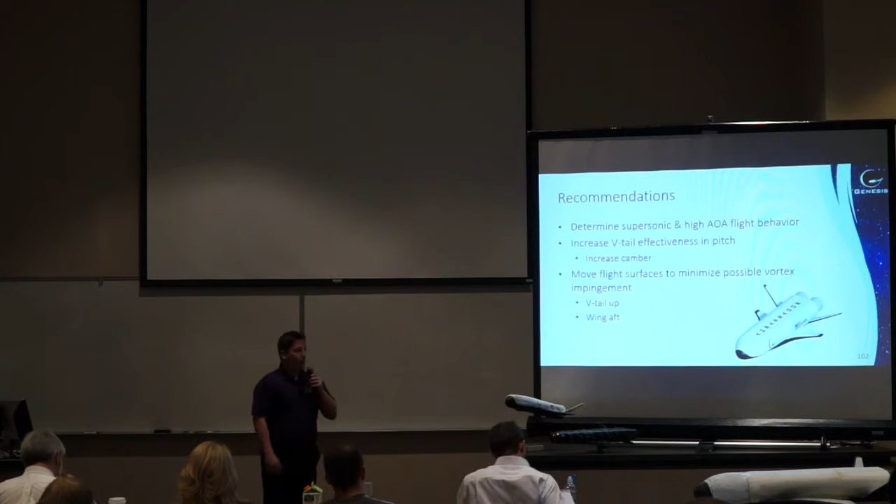And finally, we did see some vortex flow with the tufts. However, as Morgan stated, we couldn't speculate as to where those vortices were going, their path, as we didn't do any flow visualization off of the surface. However, if the conclusion that the forebody vortices were impinging on the tail is correct, we would want to move those flight surfaces in order to potentially negate or at least lessen that impact. So we would move the V-tail up and move the wing aft.

With that, are there any questions?

All right, first of all, good job. I felt like you guys did an extremely good job of presenting across the board. So...

Let's go with structures. That's what I'm good at, so I'll stick to that area. So we'll see what you have to say. Overall, it looks pretty good. Could you pull up slide 93?

Just give me a moment, thinking. No problem, take it down. School's out time... when the computer starts speaking, you're in trouble.

All right, so first question, how did you guys determine the rib and spar layout that you have there? Well, this was pulled mainly from an example of what the shuttle structural layout for their wings design was, because they had a similar kind of layout as a truss system. So that's kind of where the ideas came from.

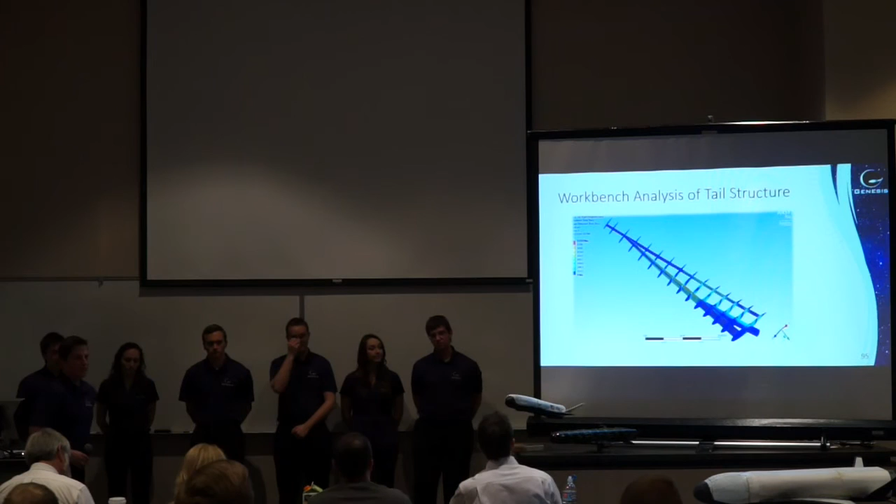I want to start by commenting on the model construction for the tunnel model itself. You guys did some really nice things in terms of identifying how to change your control surface incidence deflections and do things like the body flap. Those are very representative of how you would do it for real.

The friction set on the vertical tail incidence, however, is not representative. You would more than likely have fixed brackets where you take the tail off and screw your incidence on, so you actually know you can maintain that deflection. But the fact that you guys were able to come up with something like that was impressive.

I appreciate that. Noticing that those tail mounts were going to crack was also a big deal. That's kind of a segue into the discussion about doing a model structural test in the tunnel.

That would never be allowed. The wind tunnels out there that you would use for something like this will actually make you do a full stress analysis on the model itself before they'll even let you in the tunnel, because if you launch parts down their tunnel and destroy fan blades, they don't appreciate that.

I've had more than once we've launched SLA ice shapes down there. I've been picking them out of wooden fan blades for a while. They don't like that. So good job on those. I appreciate that.

I would urge you to express caution when you say that you've met all of your RFP requirements. You acknowledge a pitch instability, which means you have an unflyable vehicle that needs to be addressed. You don't meet your RFP requirements. You have to address the re-entry aerodynamics in some manner. Just be careful of your claims, because you're not there.

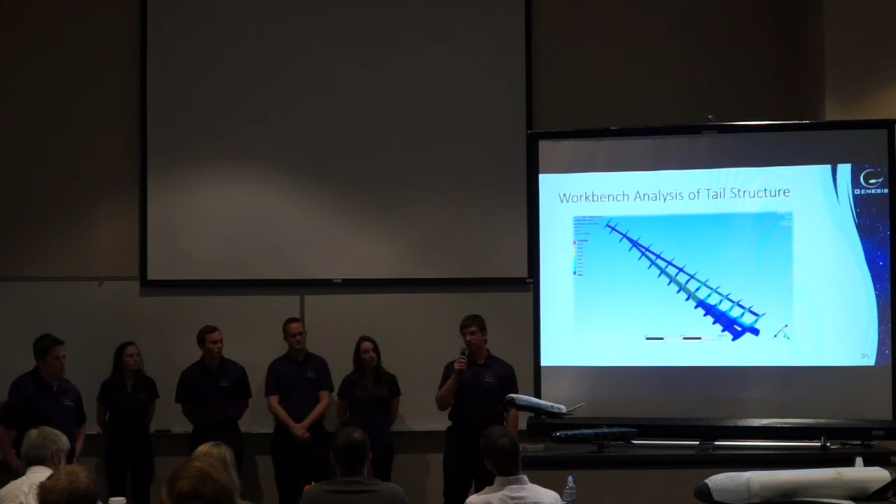You didn't notice any significant pitch instabilities while flying that one? No, but the model is also flown with a more forward CG, as most remote control airplanes are, just to keep it controllable by a human operator.

Okay, so you have multiple data points. You have one vehicle that you flew, it's a little bit different shape, but it worked. You have one that you tested that doesn't. So this is maybe one of the dangerous areas where you have two data points that say very different things. Now which one do I trust and how do I actually make it work? That's something you just need to consider, but you have something that gives you some guidance.

You flew with a more forward CG, okay? Do you need to adjust your limits on the tunnel, or do something of that nature? Just something like that. Good job, guys.

Yeah, great presentation. I like the way you all handed off to each other and introduced each other, reiterating your names again — that was great for us watching you present. I thought you made some really good choices with the flight test model. That's a great way to start out, and you learned so much.

Even if that had been a complete and total failure, you would have learned a lot by flight testing that model. And to AJ's point, you learned a bunch of stuff up front before you even got to wind tunnel testing, and when those things disagreed, you could always fall back on your flight test data because you actually did it. So you're relying less on your analysis and more on what you realized.

Concerned about the weight margin, you show that your requirements, you met those requirements. Did you calculate what all those pieces would weigh? Because you came up with exactly the weight you were required to have, and it was still estimated, that number was rounded. We are extremely close to that, if not right on that weight limit, if not over it. So what we did in weight and balance in preliminary design was calculate all the major systems, their CGs, weights. Didn't get any more detail than that. It's just that the round number makes me skeptical that that's an exact number. And you'll find that in any test data you present, when you have exact numbers like that, it raises a question. But otherwise, great job, guys.

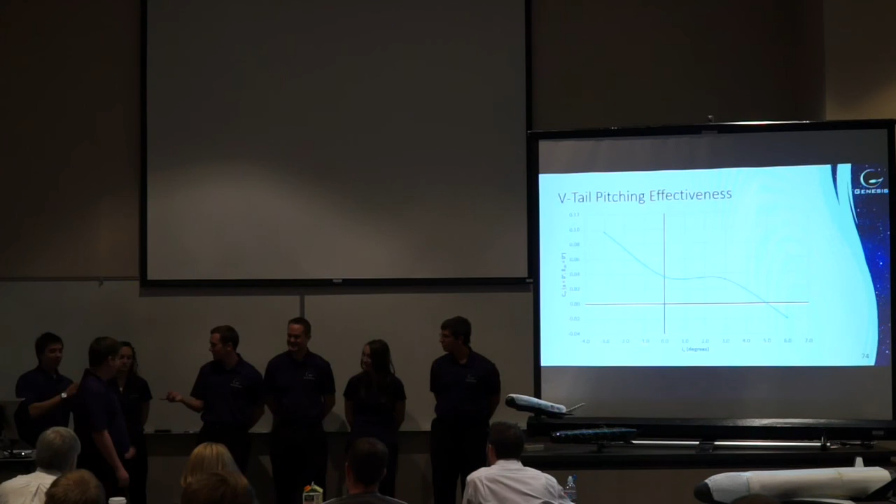Well, since the tanks, at any point in time, need to be pressurized to maintain their effectiveness to push fuel out, there would be anywhere from 6 to 14 atmospheres within the tanks, depending on the amount of pressure in it. So we don't have an analysis of the exact pressure it would be towards the latter, because once all the fuel's gone, it's just the pressure remaining in all the tanks combined, so it would be the lower 6 atmospheres.

So my thought was, if I was going to be analyzing the landing, I would be using the tank as part of my structure, and so I would need to know the internal pressure. That may mean I need to include some sort of inert gas pressurization system, something of that nature. But to me, that would be part of what I'd look to for my structure, at least for the fuselage structure. Yes. And you had a comment about the cost for Raymer.

I know Dan. I know Lee Nicolai. I know all these guys. Don't trust any of them. We might have heard that, yeah. So I actually will use a combination. I'll do at least 3 different methods to come up with something, and then pick apart, because I've done weights where Raymer's been like 200% different than Nicolai or Roskam. So just a warning as you go out, don't trust any of them.

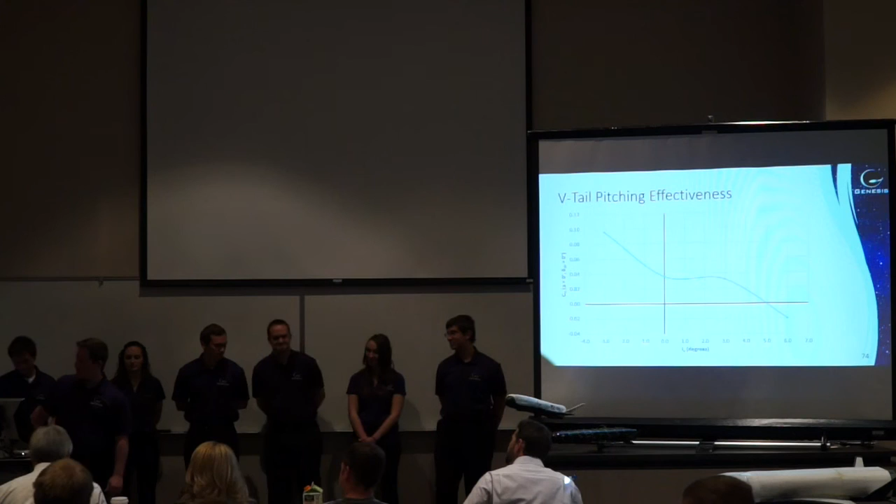All of you remember one of the very first slides I put up, the very first day of their prelim class, and they're laughing back there because they know which slide I'm talking about, because it came from one of the panel members that's up here right now. He says, well, you use CFD, you get a crappy solution - those are his exact words - and you use empirical methods, you get another crappy solution, you use wind tunnel methods, you get another crappy solution, and then what you do is figure out, with all the combination, what is the least crappy solution. I told you guys about that. That's what design is, and that's why you can't get 5-digit accuracy on design. You just can't do it. Thank you very much.